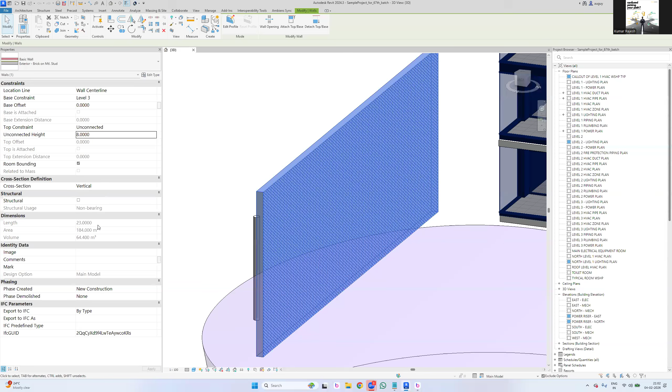Now let me make it more complicated, same concept. I love making concepts more complicated. Hello sir, am I audible?

Sir, actually I didn't understand what is double and what is integer, for example. Okay, fine, see - if your mobile number is an integer, let's consider my number is 9133665544. It is an integer actually, why? Because there are no decimal points there. In case it's 9133366.5544, this is called double. Where there is a decimal value, that's double. So remember in a funny way, like a kid's way - they remember everything with similar keywords. Decimal D, double D, they match it.

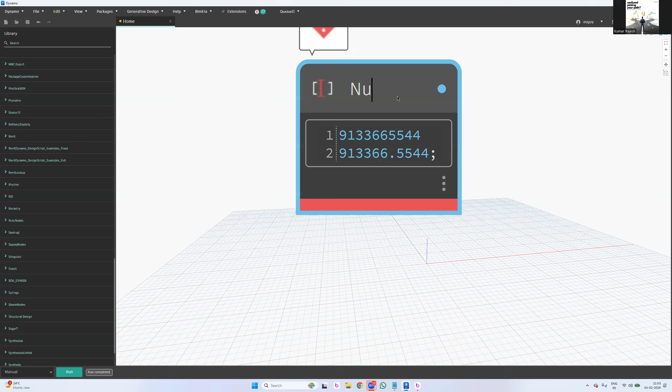Clear? So remember like that - 913366, there is a decimal value, so we call it double. And the above one, since there is no decimal value, consider it an integer. So both of them are actually numbers only, but we should not pronounce it as a number. If you go and talk to any developer, they don't pronounce it as a number, never - they call it double or integer.

Either integer or double. We will tell it as an integer or double. Okay, double. Got it. Simple. Clear. But to enter these values, there is a node called Number. In this Number node, you can enter an integer, or you can enter a double as well. Is this clear?

Yes. Okay, so this is a node. And what is this? This is actually a code block. What is that code block? We'll discuss that later. What if I write 9133665544? It's entered, but it is automatically adding that 0.000. We'll see. I'll confuse you in some time.

But first, let me make the concept clear. If after the point it will be 0, should we consider it as a double? Nice question. Because the zeros are already eliminated. Correct, so a nice question. I'll just give you the example. There is a node called Object.Type. So here there is a node called Object.Type.

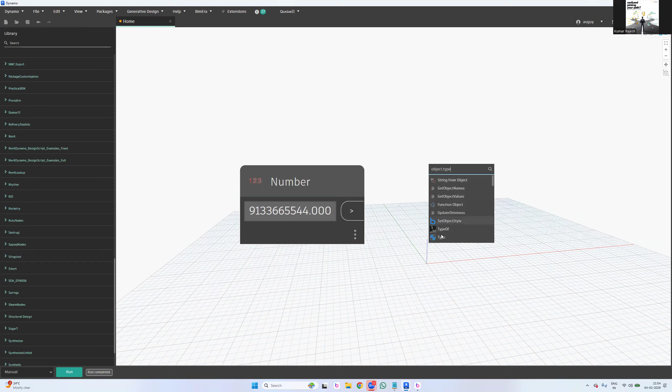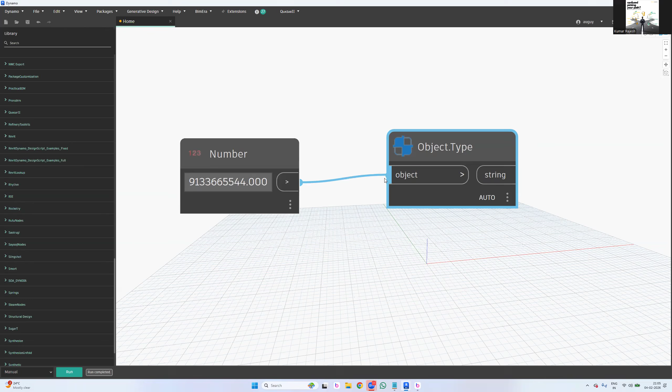This is your friend, frankly, who is going to take you in the correct direction when your script is going in a direction, if you understand the correct inputs and what you're exactly getting as an output. Is it clear? A little bit. Okay, fine. Let me show you. When I connect this to this, it's clearly saying, what is it saying? Hold on.

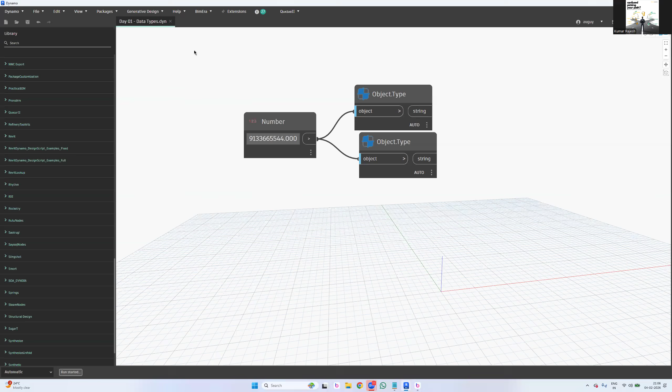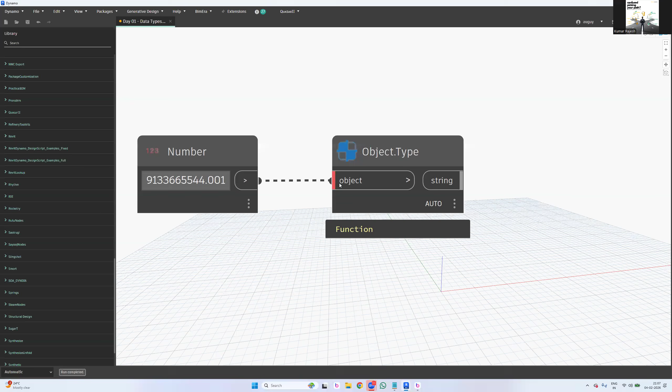See, it is showing it's an integer, int64. Why? Actually, there are some decimal values with 000, but it's still showing it's an integer. Okay. Now, what if I just add one at the end? It is not showing anything. Instead, it is showing null. Now it's showing it's a double.

Double. What if I change this value back to 0? Integer. What if I change this value to 1? It is saying it's a double. So after the point, after the dot, if the value is completely 000, we can consider that as an integer. First it will come as null, but why is it null? It is under processing. That's the reason it's showing null. Got it, completely understand. 000 is actually int64.

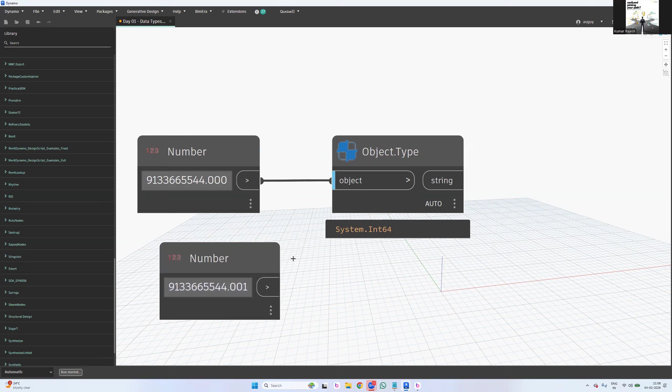But this is only for readability. Application-wise, it is something else. I'll explain in the coming sessions, because data is going to confuse you a lot. If you know exactly how to handle data, consider yourself a pro, seriously. If you don't know how to handle or at least understand the data, you are seriously zero. So first get a good grip on the data types concept. Now, what if I have another number with one? Then it will show you it's a double. Just a matter of the point. So this is going to help you know what exactly the user has entered.

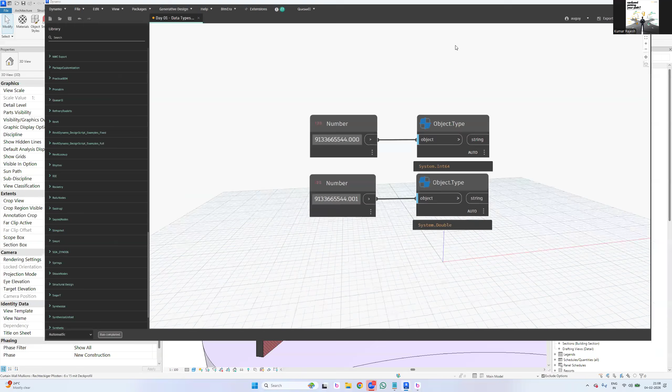And not only based on entering, there are some parameters which store some content in them. For example, let's go with some other elements, then we'll come back to this topic. What is the section parameter's data type? Integer, sir. Why? Because there is no decimal, it's a whole number. Perfect. Equivalent diameter? Double. Very good. I hope you can sense it's very simple. Area 22.742, double. Height? Integer.

So now here we have to change the way of thinking. Don't just read it and say. Apply some common sense. Generally, the width can accept something like 725.256, correct? A duct can accept decimals. That width parameter can accept a double. Am I right? Yes. So even though there is no decimal value at the end, you have to start thinking it can store a decimal value. So that parameter is actually a double parameter. Are you clear here? Yes, yes.

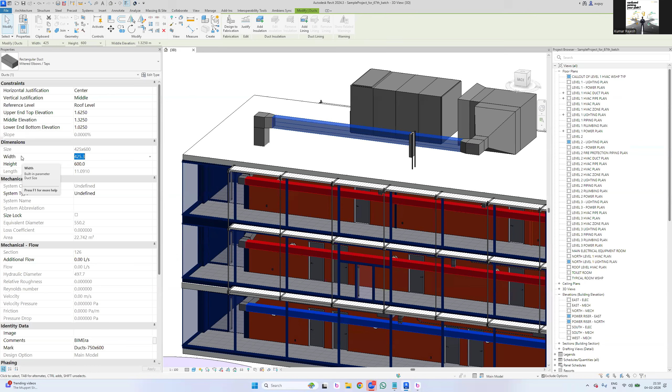Yes, if the particular parameter is accepting a double, consider it a double. We can't say that it is an integer. For suppose, let's create two different parameters. Manage project, parameters.

I have a doubt. Does the value affect anything? Like if a width is in meters. If it's an area, number-wise we can say integer or double, but as a value it's an area, or a length. Will it affect anything? No, nothing.

No, it will not. That depends upon the modeling. I'm explaining a simple concept. We'll discuss those advanced things later. Whether it is going to affect is the designing part. So let me explain the concept again. That is an irrelevant question to this.

Now I'm going to create one more parameter here. The parameter name is BE underscore integer. I'm going to create an integer parameter and show you the difference between the integer data type and the double data type. Sometimes when you are trying to set a value to a parameter, it will not accept. Both are numbers, but it clearly says I can't set that value.

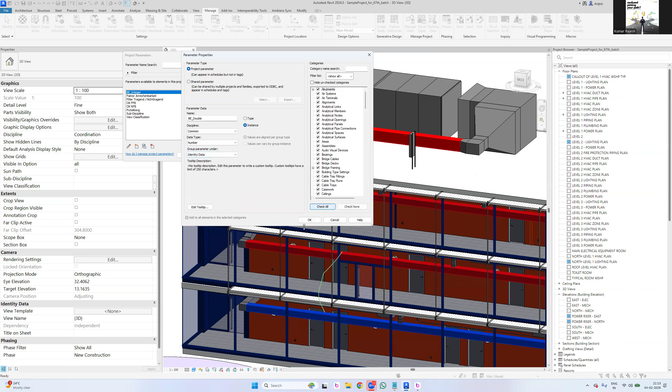So I've created two parameters here. Guys, are you clear? Yes, understood. I'll show you with Dynamo itself why it is not accepting. Now, when I click on the same duct again, I see the BE integer parameter.

If I enter 123.456, it clearly says enter an integer. What do you mean by integer? Most of you got this warning at least once in your experience, but didn't understand why it pops up. Enter an integer means it accepts values without decimals. Clear, everyone? Yes, clear, sir.

Now, what if I enter into BE double 123.456? It will automatically add 0.0000 to complete the double value. So 123.456 is working. Let me try 0.000001. It is accepting now. Initially it was not, because it is not considerable as a main value; it will be eliminated in the round off. Clear everyone? So 123.456 is allowed.

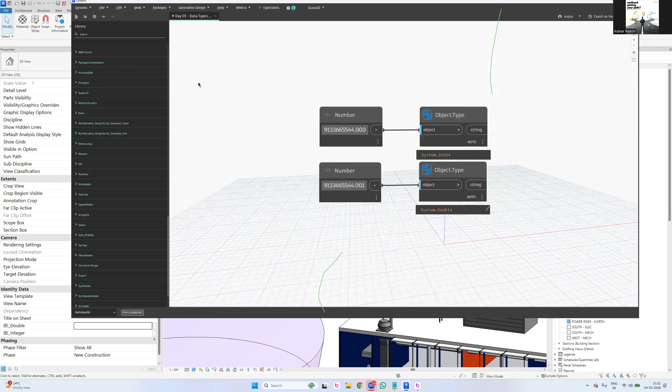Okay, all of you are correct. But what is the exact answer? I am going to reveal it at the end of today's session. Don't worry. So I hope you are very clear with integer and double. Correct? Yes. Good. So let's jump into the next concept, I mean the next data type.

It is string. So what is a string? It represents text data, like your name, Dibaj Manna, Deena Ravi, Gopal Patram, or a company name, or our passwords. Even if your Gmail password is your mobile number, it will still be read as a string, text only. How? I'll show you tonight. So examples like wall and level 1.

How come level 1? I have a number, and I have text also. So what do you mean by string actually? It is text. So here number is fine. Strings, in the sense, it is actually what happened?

It is a text only. So alpha, let's say, or else we can call it alphabets. So here I have complete alphabetical characters. Okay, alphabets. So here I have an alphabet, and space is considered as a special character. So consider I have a special character, I have a space, and I have a number, a numerical character. I have an alphabet, special character, numeric.

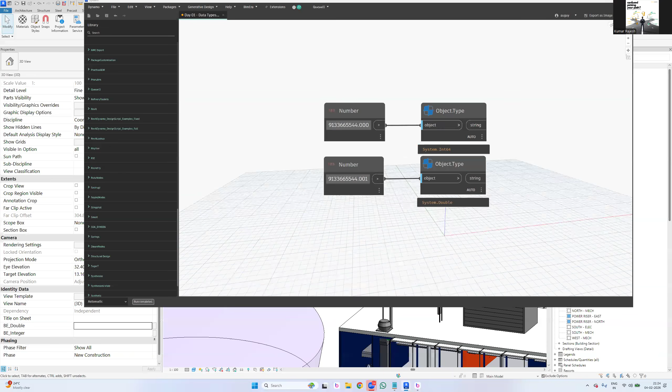Numbers. Okay. So if you have seen anywhere the complete text, or a text with a number, I mean alphanumeric and alpha ASCII numeric. Special characters we generally pronounce as ASCII. Okay, so this is alphabetical, this is an ASCII character, and this is numerical. That's it. Is it clear, everyone? Clear? Okay. So let's go and read our parameters again.

Now, center. What kind of parameter storage type is this? Text. Data type text. Vertical justification, also text. Reference level, text. Double, double, double. Oh, we have a special character here. Slope, percentage. What is this now? Is slope a double or a text? I mean string. String, it should be. My answer is string.

How many of you are with me? I think it's a double. It's a double or integer. There are points. Yeah. Okay. Slope we can also write as an expression. Let's go with a few more examples. Okay, no fighting. Size 425 into 600, that is string, because there is text in it. Okay, double, double, double.

Undefined, string. Okay, what if there is no value? What do we call it? Is that a string or a number, I mean integer or double? String. If there is no value, we cannot define. Null, sir. Not both. Right. Correct.

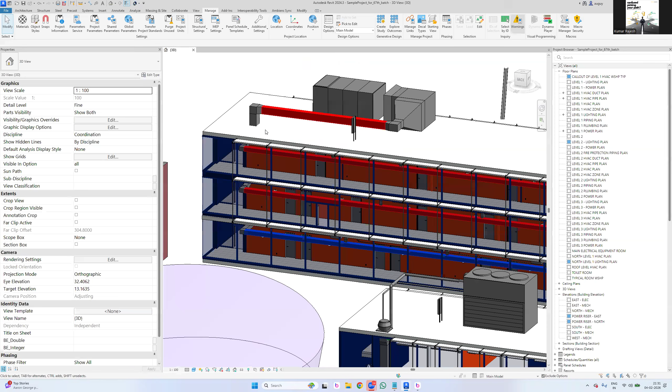Hello, can you say that one more time please? Do you need it? Okay, actually I'm coming from my office, I'm just coming from my bike, that's why I didn't understand that thing. Sorry, then you can't bother everyone in the middle. Okay, but still, first time, that's fine.

See, so on the left hand side, what are the things we have? We call these parameters. Whatever we have here on the left hand side, these are parameters, and these are parameter values. So parameter name and values - names are always in the string format only, always like a string format, text format.

Can you create a parameter with a number? Recording in progress - hey, who is that? Anirban. Hmm, okay.

Parameter values have different data types. This one has a different data type, this one has a different data type - all of them have different data types. So these data types have to be played with, based on the value here we have to decide what it exactly is. This is a double, this is a text string - actually that is not a string. For the time being, to make you understand, I'm pronouncing it as a string, but actually it is not a string, okay, try to understand. This is a Boolean - we'll discuss that in some time.

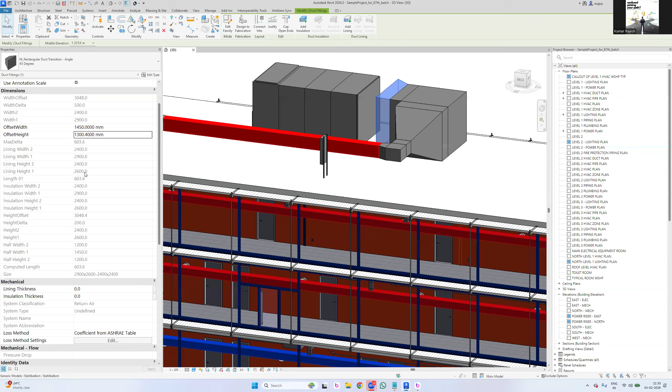Double. All of them are double. This one is a string again. See, when I hover the cursor on this, it is saying it's a text.

After built-in parameter, see the third line. What is it saying? It is a text. Undefined. Hover the cursor. It is again not showing it is like a text. It is showing it is like a drop-down list.

We'll discuss this built-in parameter. After built-in parameter, it is not showing it is like a text. Here it shows like a text. But here, yes, the system type is not showing as a text.

So actually, when it is created, it's not selected as a text. There is a specific reason, close to this. I'll explain. So with this built-in parameter, it is not even saying either it is a text or drop-down list or something. I'll explain what exactly this is.

So pressure drop, image, comments, mark. So what is the mark parameter storage type? That's also an integer.

String. Come on, you still got confused. Don't read the text, whatever mark it will be is string. Why? Because the mark parameter will accept even alphabetical in it.

Special characters in it. Yes, yes, we can use it as a filter or something, correct? Multiple, yes, correct. Yes, we can use this like a filter.

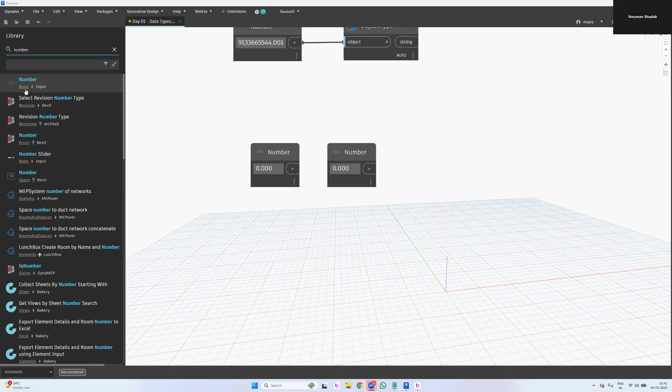That's it. So don't get panic, but don't just click on it because it will directly take you to that folder. Then again you have to sit and find where this number is.

To play with text, you have to type a node called string, not text. So again, basic, input, the text—that's it. To play with the integer and double, you use this. To play with text, alphanumerical with ASCII characters, we'll use a string here. Guys, are you clear?

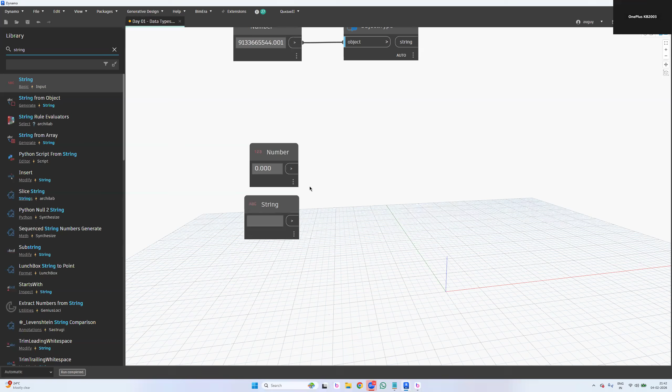Yeah, Rajesh, I want to use this very precise. I don't want to see these decimal values. There is an option—just go to Dynamo, and in the preferences, number format.

See, if I change the number format to 0 and close it—unfortunately, we don't have a refresh button in this Dynamo. We don't have a refresh button anywhere. This is not a refresh, okay. It is an execution process. So we don't have any refresh like F5. F5 works, but not in this case.

Control C and Control V. Or else, if I place a number node directly one more time, it comes with a single decimal value—I mean, a single value, not the decimal values. Are you clear?

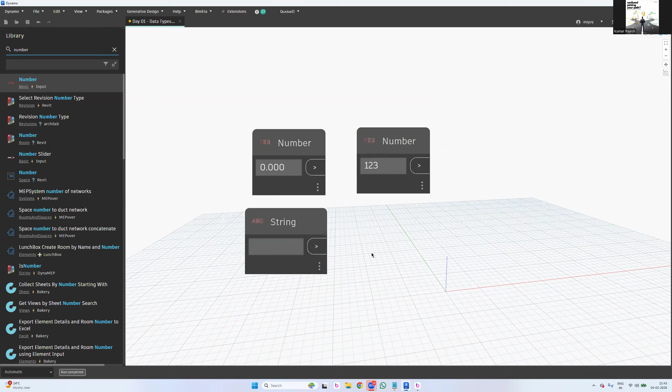Guys, are you clear? Yes. Okay, if you want to see—because you know that there is a value 123.456, it is showing like it's 123, correct? But when I'm checking the object type, it shows it is a double. It will confuse you. Are you clear? Okay, 123.6 will come under 124, right?

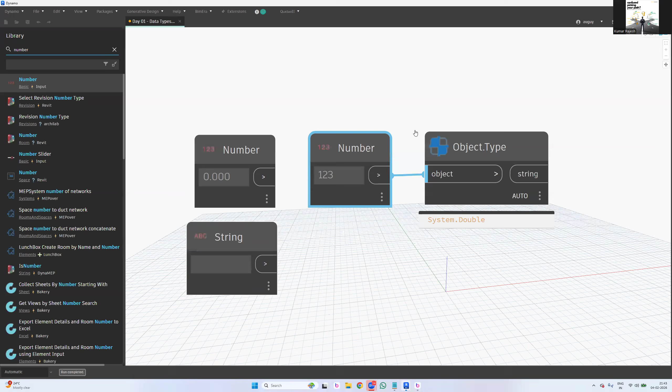123.456—now what if I just change the preferences again? These confusions will happen, okay, let me just close this. And what if I Control C and Control V—

exactly, I can see the 456, and clearly the actual value is 123.456, right? 123.456, is that clear? Yes. So the actual value is 123.456, but since you changed the option, you turned on a different preference, that's the reason it's still showing like 123, and 123 is generally an integer.

Am I right? Sir, sir, yes sir, can you just make that example 123.6?

Okay, we change the preference. I thought it would become like 124 when we change the preference. That's why I—Rajesh, sir, I had a question.

What is 64 in INT 64? Actually, it's our operating system bit. Initially we used to use 16-bit machines, later 32-bit, now we are using 64-bit machines. So INT 64 means it can store a total of 64 bits in it—1, 2, 3, 4, 5, 6, 7, 8, 9, 10, 11, 12, like 64. Got it, that's what INT 64 is.

Okay, fine, so it depends upon preference. Don't get confused—the data will confuse you a lot, and you're going to see that in today's and tomorrow's session. How even a small number which looks like a number, when you read it, shows up like a string. Okay, fine, let's jump into the topic.

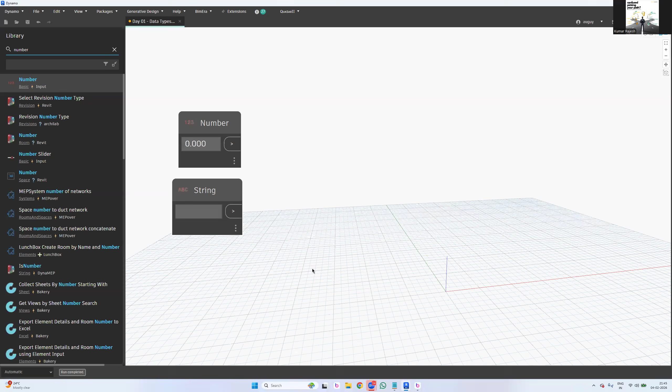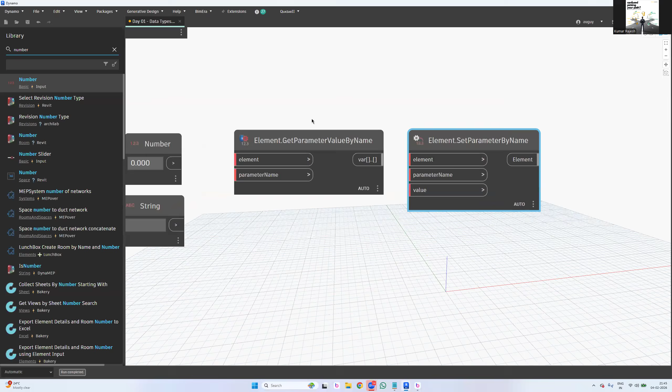So if I want to enter a number, let's say get parameter value by name. There are two different sets of nodes: get parameter value by name, and set parameter by name. These are two completely different kinds of nodes. One helps you get information - it just gets the information, it is not going to disturb any elements in our Dynamo.

Simple, are you clear? No sir, I didn't understand. See, I'm clearly telling Dynamo to do this - are baba, I have an element.

So there is a dot here. Actually there are two parts. There is a very huge importance for the dot in general in coding. I'll explain why, and later in the coming sessions there is a concept called dot notation. For the time being, try to understand.

Before the dot, it means what I'm expecting - what actually, let's consider, that explanation of what is having with you. What is having with you? And after the dot, what do you want me to do? What do you want me to do? Guys, are you clear? Is it clear?

Yes, are you clear? Before the dot, what is exactly in your hand right now? I have an element with me, and I want you to get parameter value by parameter name. So I'm telling that I have an element, bro. So if I want to play with the work set, so work set dot get something.

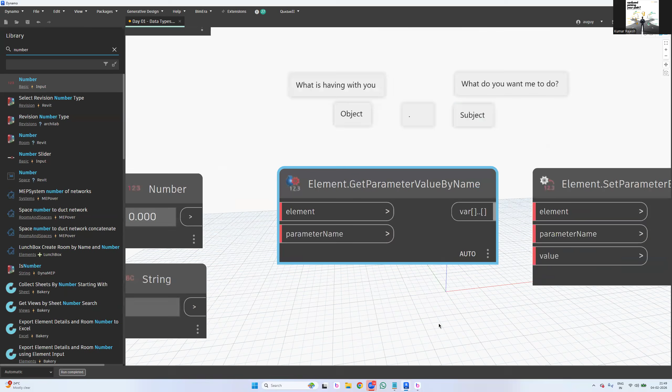Yes, clear. So now, how do we connect those exact inputs? Here we are playing with a 'get' - so get is actually trying to get something, so it will not disturb any set process.

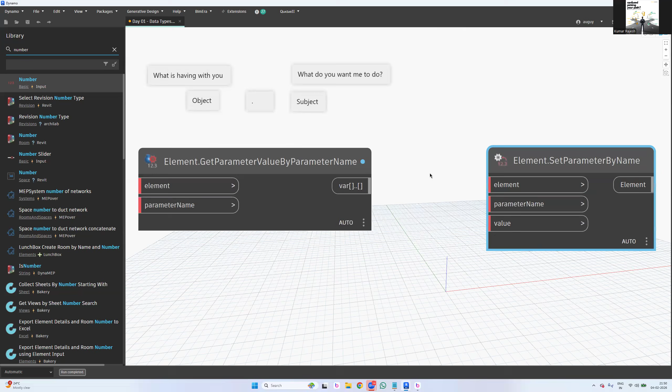But here we are trying to set something. So I have an element, we are clearly saying I have an element, and I want you to set a parameter value by parameter name. Actually this has to be the node name, but the node name would look very lengthy and somehow funny, correct? So that's the reason they have truncated and designed it like this - get parameter value by parameter name.

So here, set parameter value by parameter name. So now I have an element, I want you to set a parameter value - where is the value? Here. By parameter name - to which parameter? You have to enter the parameter here. Clear? Yes, clear.

Let's play live. It is expecting an element. So how do I bring that element now? There are multiple ways to bring an element. I can connect a single element, I can connect multiple elements, I can connect elements with a condition - like if I say bring all the ducts, I can connect all the ducts to this. Or get only the ducts from level 1, I can filter and get it and connect to this. Or I just want you to pick manually some set of ducts.

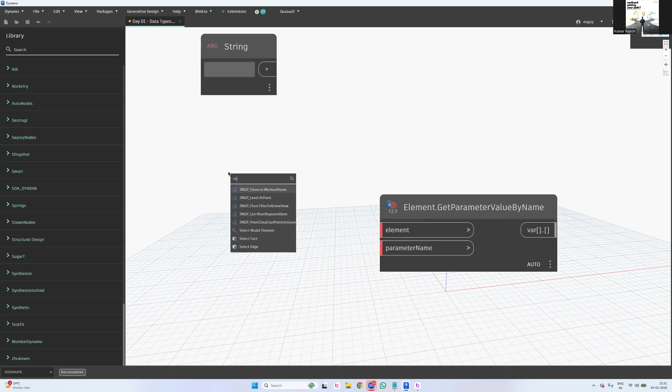Still, I can do that. Rajesh, only for testing, I just want to check how exactly it is working. Only a single object. So, Select Model Element. When I click on this, this is a button actually. You have to click on this button and wait, and then jump into Revit.

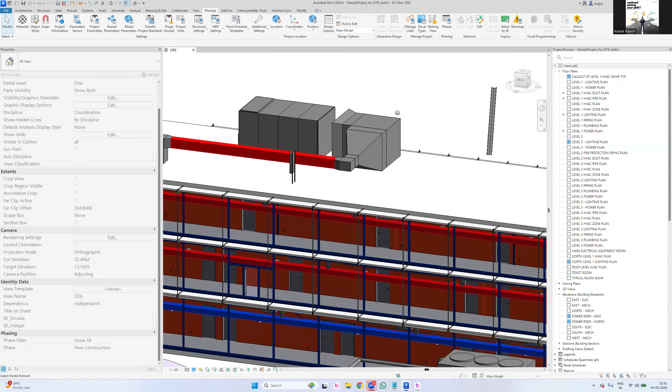So here it is showing something like a stop sign. This stop sign will be active whenever you start placing on any element. So let's take this duct. Okay, got it. Now if I come back, it is saying 478246, and that is a duct. Are you clear? Guys, are you clear?

Is that a very simple element ID? Yes, that is an element ID. Yes, got it, sir. 478246. So 478246, select by ID. 47, sorry, what was that? 478246. See, that's the same element.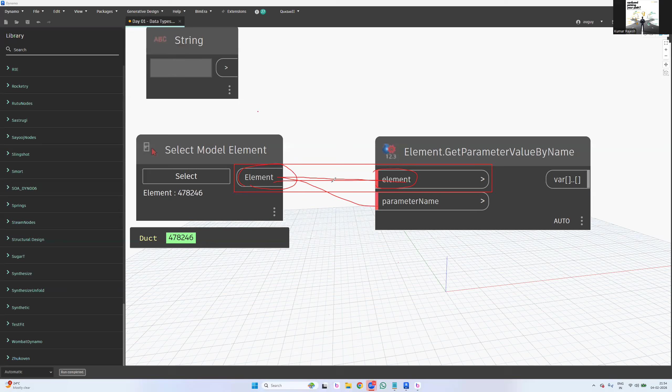Correct. Exactly. So we have to connect exactly in sequence. It is expecting two inputs, input one and input two. The first input is clearly saying element only, so the second input must be parameter name. You can't shuffle the order. So if it is expecting an element, connect this element to element.

Okay. Now the red turned to blue. It doesn't mean it is working. So if red is turning into blue, it doesn't mean it is working. Seriously. I'll explain exactly later. Okay, fine. So element: when I hover the cursor on it, it is saying Revit.Elements.Element. What is it? Don't ask me now, I'll explain later when the time comes.

So when I hover the cursor on this: the name of the parameter whose value you want to obtain. The name of the parameter for which I want to obtain a value. Simple. And use a string. I'll accept a string, bro. So what input is going to be accepted? String. String only. Correct, sir. Because it's clearly saying, but don't expect it on every input parameter, it will not show you.

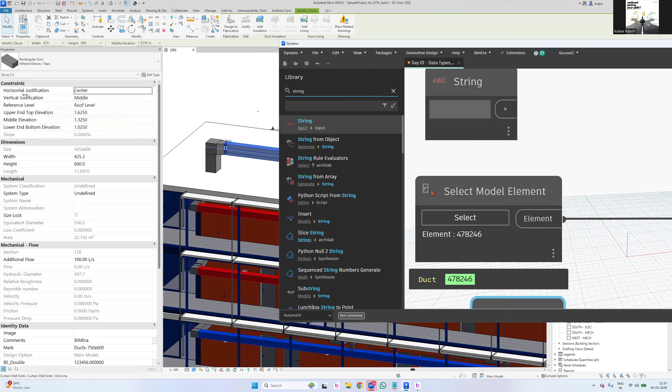Okay, then I'll place a String node, or else I'll use the node library, String. Don't get habituated to finding nodes from the canvas. Since I already have a bit of understanding, I'm using it here, but 99% of the time you have to use the node library. So I place the string, cool. And parameter name, let's go and get some parameter. I'll say horizontal justification. Okay, no, let's get middle elevation.

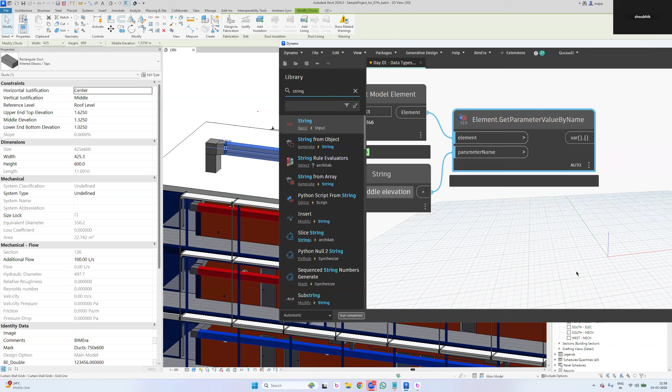Middle elevation. Okay, now when I connect this to this, what will be the output? It's supposed to show 1.3250. Why is it not showing? You should change E to capital, sir. Capital C, case sensitive, I guess. Case sensitive? Okay, capital M here. Capital M. Okay.

Capital E also, right? Yes. Space also? No. I think it is integer. Are we using string? No. Now it's showing. It's showing 1.325. So we need to type exactly what it is asking, right? Yes. Even if you missed anything, or if it is not exactly case sensitive, it will look in the database, consider there is no such parameter, and it will not bring you anything.

Now, middle elevation, and now if I'm asking for the width parameter, change to width: 425.256. Actually, the value showing here is 425.3. It is a rounded value, but here is the actual value, 425.256. Guys, are you clear? So if I type height, I'll get the height here, 600. What if I'm asking for additional flow? 100. It is not printing liters per second here. It is just getting the number, if you noticed. Correct? Yes.

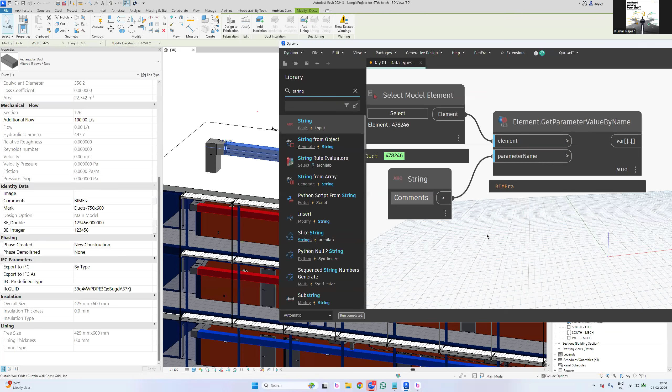Now, again, let's say friction: 0. Very good. So comments: BIMEra. So it's getting everything here. Is it clear, guys? Yes. Now, the biggest part of our concept. Let me try to change this value to something else. Sir, I just want to say one thing: when we get the parameter value, it will only understand whether it is double, integer, or string, but it doesn't understand units. It will not read the units.

Okay, so because of the unit, I guess it will only act as a string, right? The value is only string? No, number as well. Can I check whether the value I get from this parameter is a double before I use it? I'm going to explain in a different manner. So when I connect this, it's saying it is a string. What if I'm playing with some other data type? Let's say additional flow, and it is saying it is a double. Do you see that? I got the number 100, but still it is showing it's a double.

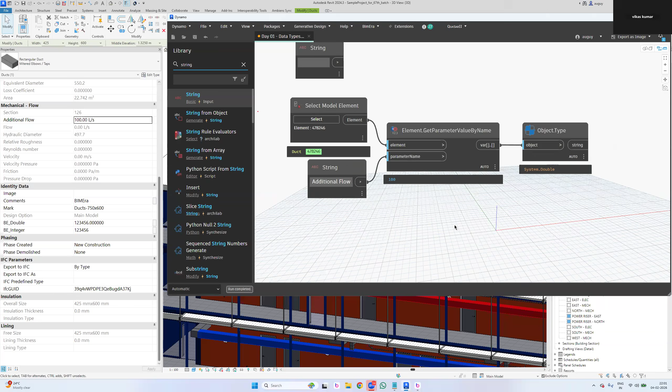Why? 100 looks like an integer, but it is saying double in the sense that additional flow can be 101.346, something like that; it can accept it. So that's the reason it is double. This parameter can accept decimal values. Is this clear, everyone? Yes, clear, sir. So this is how we are extracting the data, and we are cross-checking the data type.

Rajesh, it's a very headache process. I have 50, 60 parameters, and I'm a coordinator, I'm a manager. Do I have to play like a kid? No, there is a process. I'm asking Dynamo: I have an element, can you please get me the parameters of it? Element dot parameters, there is a node. I'll type it here: Element. See, again the same concept. What do you have with you? I have an element with me.

What if I have a sheet? I'll type sheet. What if I have a work set? Work set. What if I have a wall? What if I have a duct? See, the element nodes keep on changing. What if I have a column? Guys, are you clear? You must be very clear about what you have. Can you explain this? This block is especially for finding nodes, this node library. If you want to play with a particular object or element, you have to type exactly what it is. Is it clear? If you want to play with something, you have to type it here.

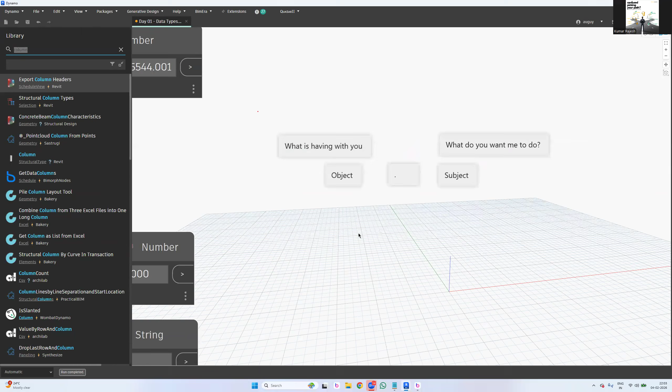I want to play with a list, type a list. I want to play with a string, type string. I want to play with a number, type number. Are you clear? Node finding to find the particular nodes. Okay. Now I have to say this in very simple terms. Let me show you one more.

This concept is called actually parent and child. That's going to be very interesting, but this is not a part of this concept. But since few guys are confusing, let me make it very clear. This is the concept actually, object and subject. So I have a person with me. There are some sort of typical concepts again, but three different typical stuff. Okay. So I have a person.

I have an element. I just want to know what is the category, element dot category. I have an element and I want to know its name. I have an element. I want to check what is the ID of it. I have an element and I just want to know what is the location of it. I have an element and I want to know what are the parameters it has.

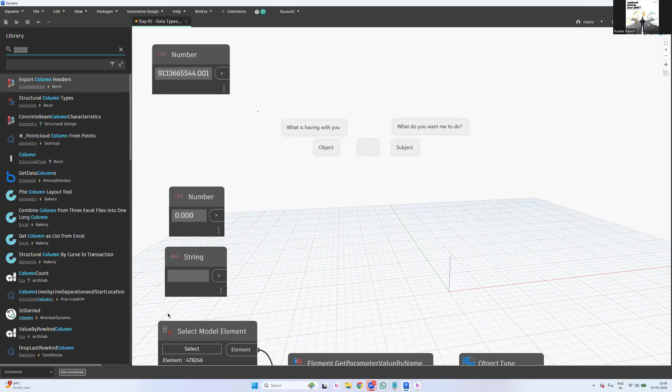So today's concept is to make you understand what is a text, I mean what is a string, what is a number, I mean what do you mean by integer and double, that's it. Okay, so the rest of the concepts I don't want to scare you with on day one itself. There are many scary sessions, don't worry. Okay, so fine. So what I want to explain here, yeah, dot.

Now I'm saying I have an element. So when you check element dot, when you put a dot after it, it is going to give you the list of all the functions it can play with an element. So if you have an element, it's going to get the work sharing tooltip info. This node will tell you, if you connect an element, who is the creator, who created that particular element, who is the current owner of it, and who changed it, who moved it.

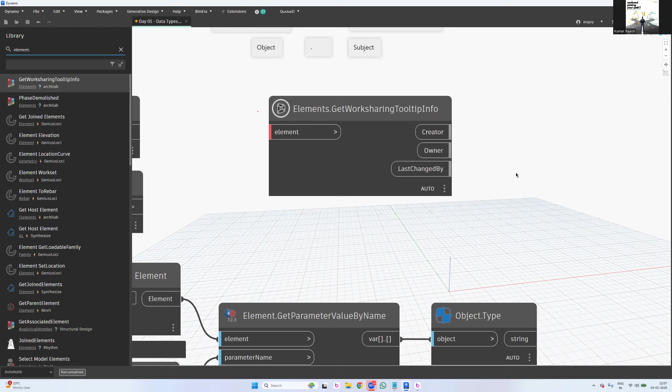Let's say Gopal Patra placed some elements, walls. There is another guy, Kajal. Kajal has changed that element. She has moved one from one position to another. Then we can see both people's names here if I connect the particular element to this. See who created it, Zhang, who is the current owner, A, and who changed it last, Zhang again. Guys, are you clear? So if you connect something, I'm going to get that complete work sharing information.

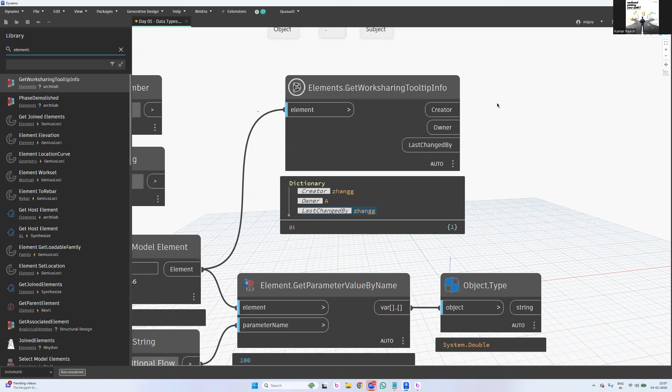Are you guys clear? So if I want to get the name of that element, after the element I have to put a dot. Then dot will explore many things. Understand? Unfortunately, this node library will not give you the exact things. That is the only reason we are using another node library. This is especially for our students.

Okay, so if I type element and put a dot next to it, then see how many nodes are there. Thousands. Do you see that? When I keep on scrolling, they keep on coming. So all these nodes are to play with elements only. Guys, are you clear? Yes, clear. In this node library, you can't see that many, maximum 20 or 30.

Why? This is a dedicated one. And this doesn't need more. I mean, I don't want you to use your brain. Seriously. Okay, of course, in the training, you must use it. After training, I don't bother, because you will be more lazy with some advanced strategies. Okay, fine. Here, you have to apply the 6 different strategies to play with everything, but still, there is a lack in it.

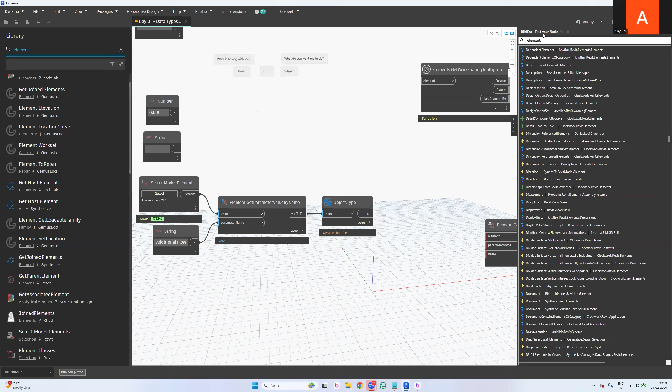So if you're having this, we don't need to install any external packages? Everything will be covered in this, or it will just show the inbuilt? No, no, no. You have to install the packages. Within the packages only, it is going to show you. If you don't have any packages, it will show you the same limited functions only. Clear? So I'm going to share you all the packages. Don't worry.

Element dot, I'm going to type ID. So after element, I'm asking, I want to get the ID. So when I click on it, okay, it is expecting element. So when I connect this element to the element, it's going to give you the ID here. Say 478246. Are you clear?

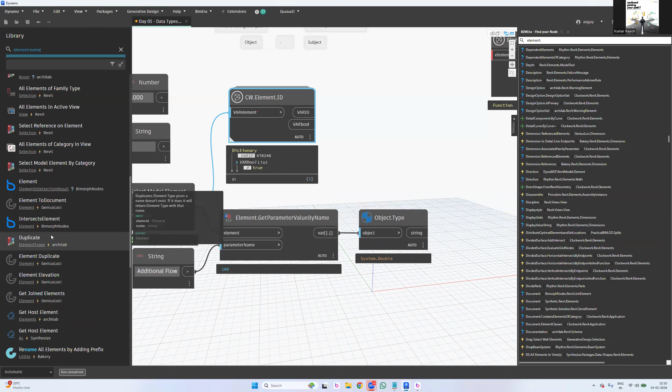So if I'm asking for element dot name, where is that? There is a different way of picking the nodes as well. Very funny, because a person who is having real knowledge can directly place that node. Seriously, otherwise not. Now, element dot name, there is a direct node, but still I couldn't find anything here.

Next strategy, I changed the strategy. There is no dot now. If you notice, now see, I found element dot name. When I connect this element to the element, it's going to give you that. It is a mitered elbows taps. Are you clear? So element dot ID, element dot name, element dot.

If I want to get the location of it, I'll type location, element dot location. Okay, fine. When I connect this element to this, it's going to give you where it is exactly. Do you see that? Actually, it is a line with the starting point and the ending point. Guys, are you clear? Yes. We'll discuss this topic later. Okay, fine.

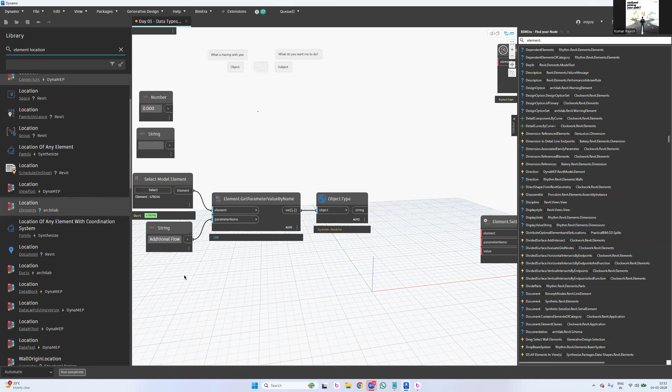Now additional flow. How do we exactly get it? Now I want to play with element dot parameters. Let me check element dot parameters. So the way we read element after this dot, this will come here, or else you have to read it in a different way. Revit dot elements dot parameter. This is actually in the reverse option. You have to read it in a different way actually.

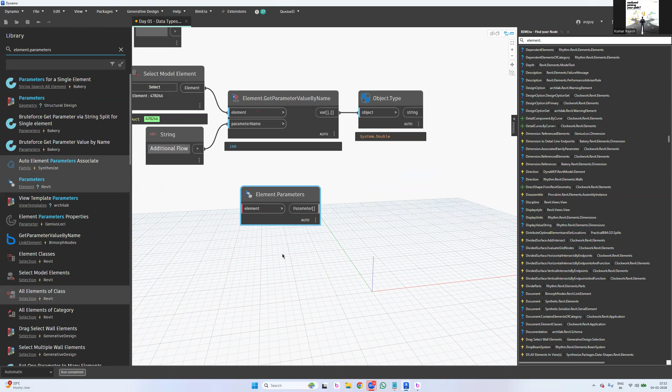Okay, if you have element parameters, when I click on it, now it is asking, if you simply connect me an element, I'm good. I'm going to get the parameters. See, I got all the parameters now. I got all the parameters which are listed in the properties palette. Guys, is this clear? Yes, yes.

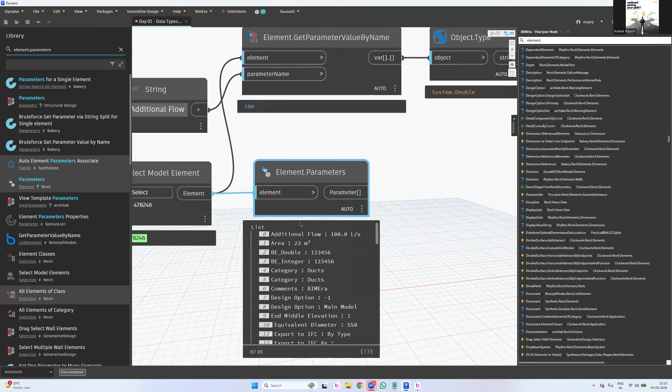Now, what is the output I have here? There are 73 parameters. I have total 73 parameters. So the output is, see, since it is expecting element, and it is returning an element, I connected exactly both. This is actually returning a parameter. To continue further to this, in a node, what's supposed to be here? Parameter. Very good. Parameter only. Correct? Yes, parameter.

Parameter only. Now, let's forget about what it is actually returning. But here, it is expecting parameter. So, you have to start finding a node with a parameter. So, let's change this to the parameter. That's it, bro. Very simple node finding. And there are few more strategies. Let's keep on learning till the end of the training. There are many.

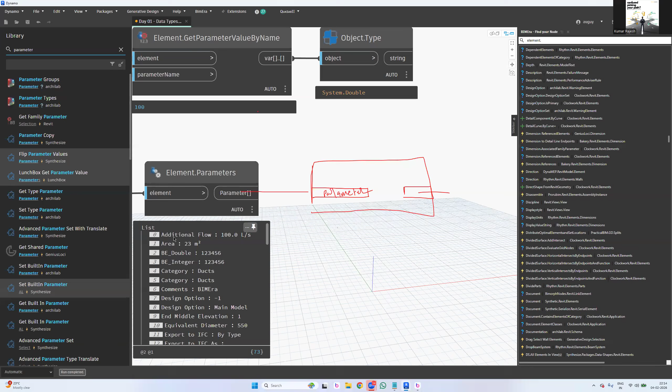So when I type parameter, parameter dot Get parameter is there. Okay, fine. There are many parameters here. So which one do I want to pick now? What do I need exactly? Okay, Rajesh, that's fine. This is returning something. I know that is the next connecting parameter. The node is expecting parameter, but what do you want here? Want to pick any parameter from all these.

Okay, so to pick it, here I have two parts. So parameter, I have two parts here. The left hand part is actually called parameter name, and the right hand part we call the value. Correct? So this is parameter name, and this is parameter value.

Correct? Now after parameter, I have to ask dot name. Am I right? After the dot, I have to ask value. Dot value. After the dot, I have to ask what is the data type. Correct? So what is the data type? Now let me try all this. After parameter dot, I'll type name here.

Let me check. Am I getting 'First' only? See here, revit.parameter.name - the first one is showing something, parameter by parameter name. This is something else, it is expecting something. How do you come to know? Based on the symbol - here it's a plus symbol, here a question mark symbol, here a zap symbol. So there are three different symbols. We'll discuss this topic later.

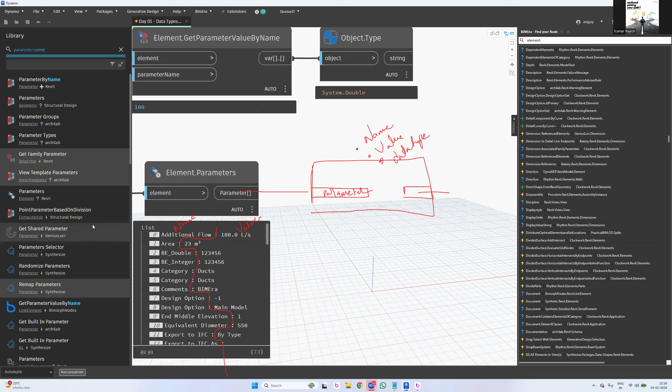Now I'm expecting if I have a parameter, I just want to get the name out of it, not creating anything. So parameter.name - see, this is a question mark, meaning it's asking what is the name of it. Now when I click on this, don't get confused, I'll explain. So parameter and dot name. When I connect the parameter to parameter, it has separated and printed all the names here. Names got separated, do you see that?

Now I want to get the values. How? Parameter.value - come on everyone, what is with you and what do you want to get exactly? So parameter.name, parameter.value, parameter.data type. Okay fine, so instead of typing name, I'll type value here. And again I have to sit and check if it's there.

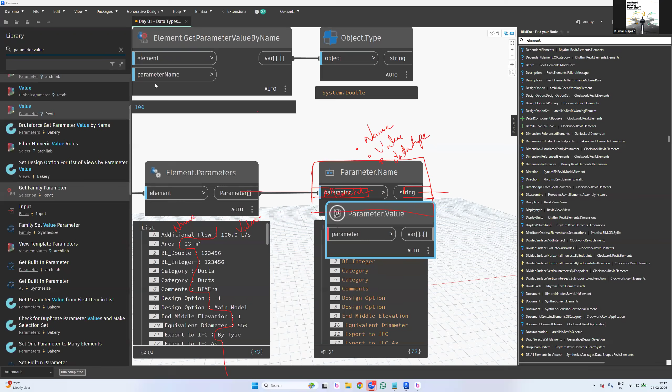Do you have parameter.value anywhere? See, it is there. Don't get panic, because you are finding the nodes faster - there is a technique in it. I'm going to reveal the technique exactly how I'm implementing and finding the nodes. You guys are also going to get the same kind of knowledge. Don't panic. But finding the node is a little bit confusing. You're still in the day one session, bro - it'll take some time.

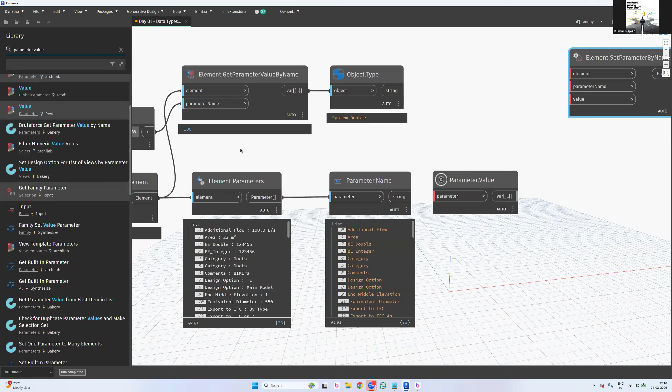Now, I have a question - in this node 'get parameter value', can you explain the output over here? VAR, it's something, what is that output? That I'll explain later, because VAR means it varies. It is not actually a variable, it varies - it means based on the parameter whatever you connect, I'm going to vary the value.

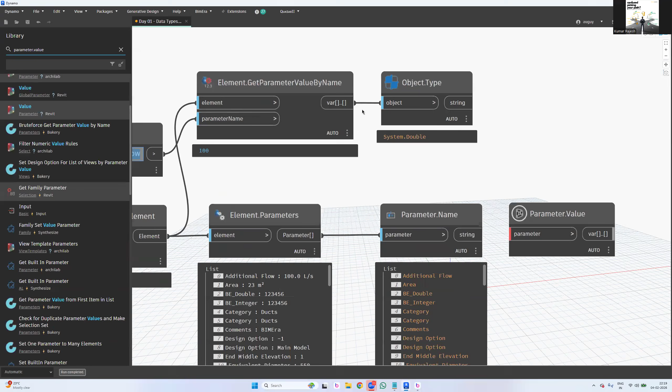So there are multiple values it may bring. For example, if I connect an integer parameter, it will give me the integer. If I connect the string data type parameter, it will get the string. If I connect element ID parameter type, it's going to give the element. There is no strict output it gives. Got it? Clear now?

The parameter.value is expecting something, so from where should I connect? From here to here, parameter, element parameter, or element.parameter? Think twice before you answer - it is expecting parameter.

I have parameters here directly, so can I connect from here to here directly, right? No, these are all strings - that output is string. No, these are all parameter, that is like a string. You're not getting the point - output is string, that is. Are you sure that is parameter? Are you sure parameter connects to name only?

So you are in the day one session itself and you are completely anti to me. Huh? No, answer. No, that's not the thing. I just want to say that element.parameter comes directly from the element. But if there is a parameter.name, there is a string over there which suggests that these values are converted into text.

Okay, what if I connect this to this? What will happen? It will not take, because it's not connecting parameter to parameter - that's not a parameter I guess. So instead, yes, it is actually returning a warning. See, this is a warning symbol, not an error. So this is a warning symbol.

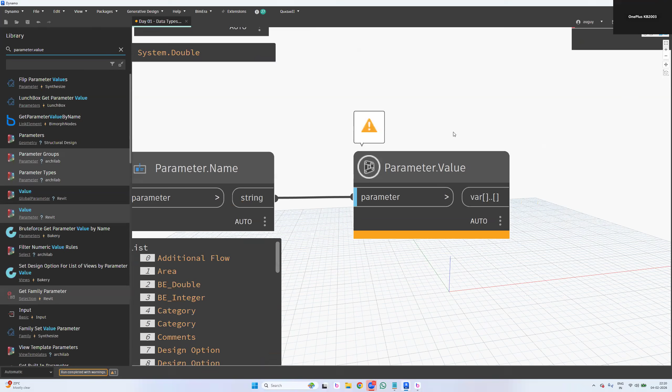What is that warning? Let's read it. I think it will definitely scold me. See, parameter.value - let me explain this in a very polite way to make you understand better. I have to close this.

Okay, control V. Now what is it actually trying to say? Oh, it's loading up, okay fine.

So parameter dot value, this is a node name. Parameter dot value, see I'm breaking it into parts. The warning, every time a new warning comes, try to break it and read it. Where does it come from, maybe this one. Parameter dot value, okay both are okay, that's fine, so this two-way direction.

Parameter dot value, expect - let's make it into the continuation form. Expecting argument, in the sense, input bro. Input, so input argument in the sense input.

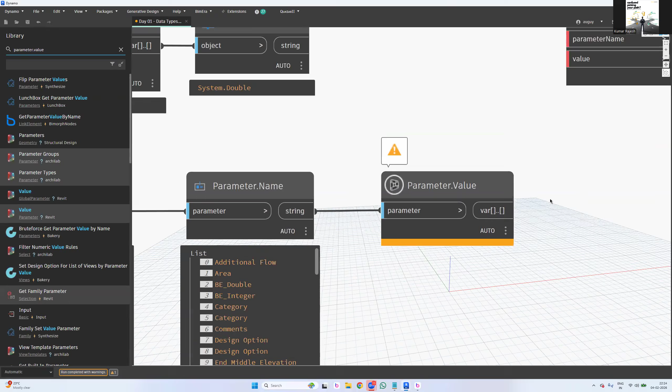Okay, I know you are expecting something, so I have to connect from here to here directly. Happy? I think the node is happy now. Correct? So let me suggest one thing.

Can we not see that warning itself in Dynamo, showing what we are connecting and what is asking for the value, as a display in Dynamo itself? We cannot see that warning.

I've shown you in Dynamo only, right? Here it is, see, it's on the top of it. From here only I took the screenshot, bro.

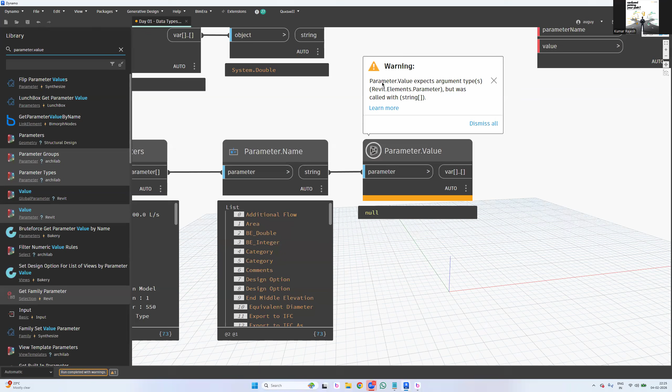So when you hover the cursor on this, you'll see the warning here. So read it, because I can't draw there, I mean I can't use a pen there.

So that's the reason I copied the screenshot and pasted it there. Fine, so that's what happened when I connected this element to element, then I got it. So these are the parameter names and these are the parameter values. Now one more left, what was that?

Storage type, correct? Sir, may I ask you a question? Yes, but we have only 5 minutes. Later, I have to give you some assignment as well.

Okay, so after this let's have questions. Clear? Let me finish this. So...

Parameter dot storage type. There is no actual reason.

I mean if it is crossing beyond 2 hours, it's very hard to convert that video and upload it, it may take a long time. So that's the reason I stopped the recording exactly at 10 o'clock, 10:30, 10:35. Okay, so parameter dot - I'll stop the recording but we'll still continue the conversation.

So parameter dot storage type, where is that? Storage type, storage type, so here it is.

So how do you exactly find this, Rajesh? If you really want to know, it's a very simple trick. If you're looking for something, a parameter, you have to see that parameter in bold, I mean like a hyperlink. So where this is a hyperlink, this is geometry - no, this is parameter, I can play with this. I can use this, I can use this, I can use this. No, no, no, no.

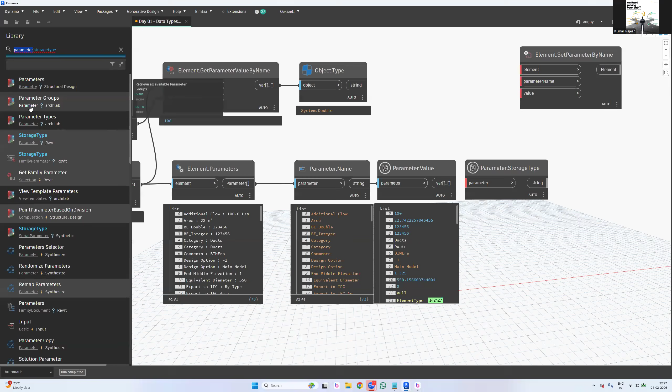I can use this. Guys, are you clear? I'm playing with a parameter, and that particular hyperlink is supposed to be the parameter itself. Is it clear, bro? I'll explain that later, don't worry. Let's learn one by one.

So, parameter dot storage type. Now what you have to do is very simple - that's today's task. If you haven't installed 2024 yet, that's fine, but I do recommend it. I'm going to share the script with you - forget about this, just focus on these three.

Focus on the three additional flow. Check what is the additional flow here. Where is that additional flow? Here it is - 100.00 liters per second. This looks like liters per second because liters per second is a unit, and this is a double. Cross check additional flow - the value is 100, storage type is double. Is it matching?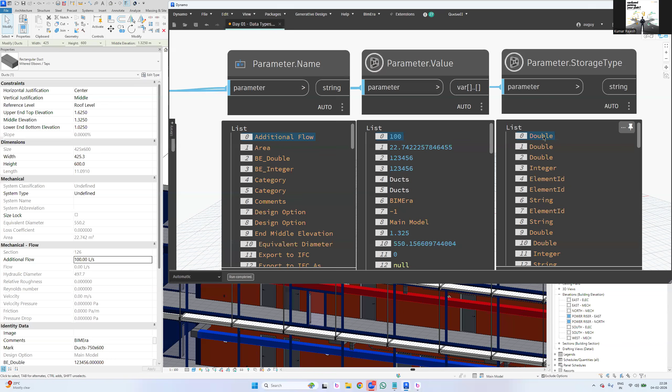Is that matching with your explanation? Yes, correct. Good, let's go and read the area parameter. Now I want you to pick any element of yours - I have to repeat the same process.

This is only in the initial stage, bro. Trust me, you're not going to do this process again and again - only on day one. Are you clear? Only on day one you will do this, or at max day two or day three. Later on you'll be habituated unknowingly, and you'll start answering yourself.

If you're from plumbing, pick a pipe instead of a duct. If you're from electrical, pick a cable tray or a conduit or a lighting fixture - any electrical element. If you're from architecture, pick a wall or something else. If you're structure, pick a column, beam, or something else. Guys, are you clear? Everyone clear?

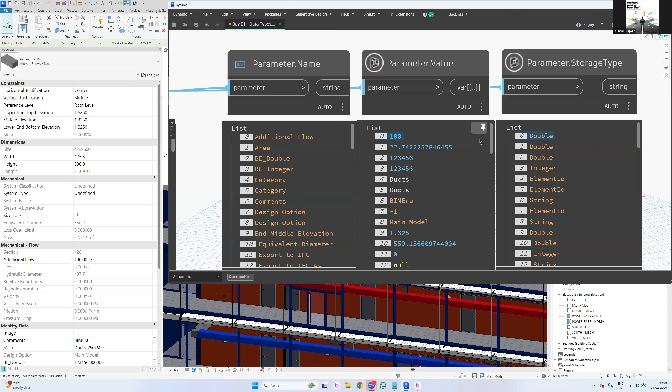So play with the parameters because we are going to play with the whole data only - data is nothing but like parameters. If you don't understand this, tell me clearly. Shall we play with some more assignments on the data? I'm happy to spend some more time on the previous concepts, no worries, but you should be very very clear on it.

Is that clear? Now, area - check 22.5 area. Where is the area parameter? 22.742 - so the value is 22.742. Storage type is double. Good, perfect.

In the BE_Double, the value looks like an integer, but it shows it's a double parameter - double parameter storage type, double data type. Correct? So BE_Integer, okay, 123456 - now it is an integer.

Forget about element IDs for now - tomorrow we are going to see what an element ID is. The main confusions continue tomorrow. Is that clear? I'm not explaining it today because you guys are not 10 or 20, you're 45 - the confusion rate will be more. That's the reason I'm going a bit slower.

So category, forget about element IDs. Check double, double, double, integer only - we don't have multiple data types here. Double, integer, string, element ID - that's it. If you really want to cross check how many data types we have, use List.UniqueItems - this node will eliminate the duplicates. So I have only four: doubles, integers, strings.

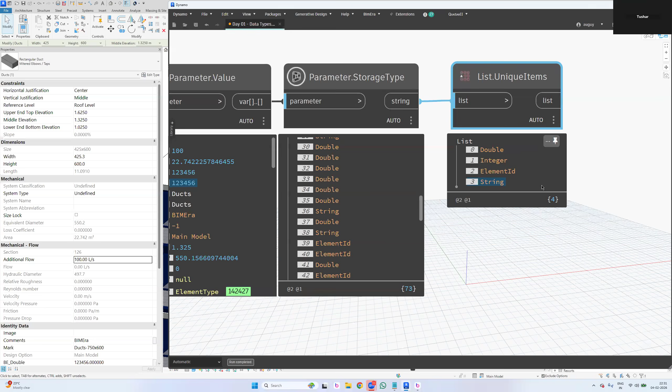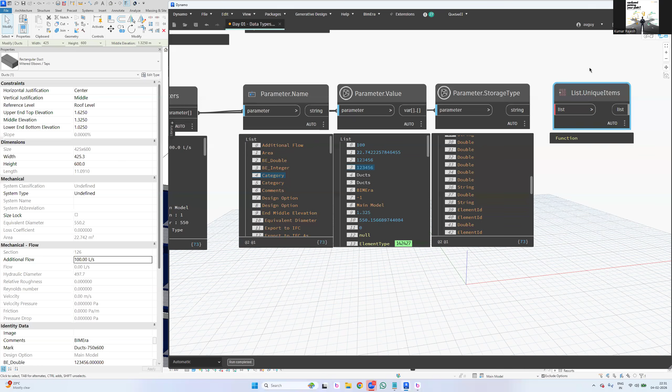There's also design option, and it is wide - is it coming like -1 in the seventh number? I'll explain that later, negative values I'll explain later. Sure, everything will be covered, don't worry - you're just asking one or two sessions ahead. That's it, because if I started explaining I'll deviate to something else, so don't let me deviate. I'll explain later.

Okay, so double - now I want you to play with each and everything. What is this design option? Like what is this end middle elevation? Where is it? Above, above, lower and mid, lower middle.

I think this is a type parameter - no, this parameter's name is end middle elevation. Do you have end middle elevation here? Check in edit type - I think we have it there. Yes, the down of the lower and bottom - this is elevation distance parameter. We don't have end middle elevation parameter. How come it is? Okay.

Equivalent diameter - can I see equivalent diameter? I can see that here, it is there, it's there. Okay, forget about it, we'll see this later in tomorrow's session.

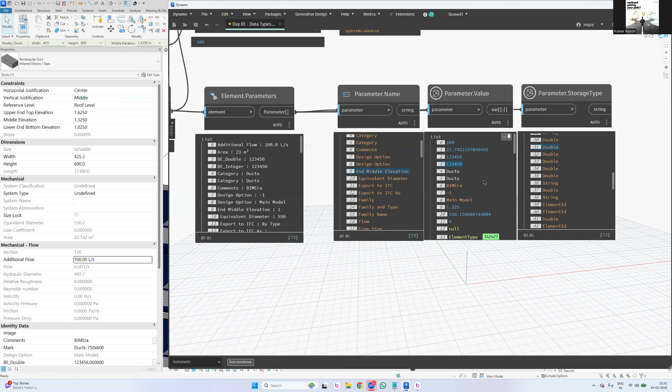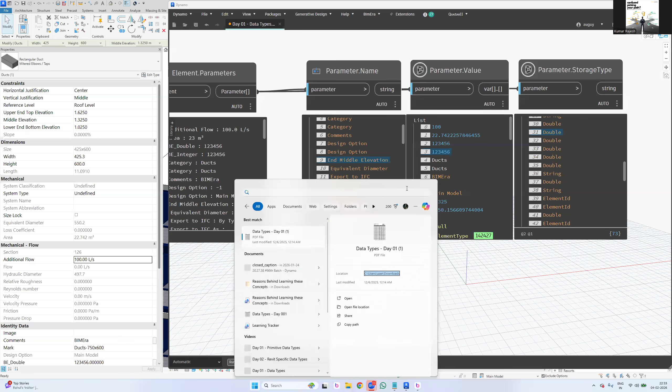Now what I want you to do is write down somewhere - I have already shared your PDF file, which I have to open now. Data types - I hope everyone downloaded this. Data types day one, okay, so this is a PDF. Take a printout of this.

Take a printout of this. Write down what is the element that you exactly picked, if it is a duct or tray or something, and what is the variable name, in the sense parameter name. I don't want you to use complicated names in the beginning. So system type is a parameter, BE_Double is a variable, integer is a variable, comments is a variable. Generally we read it as a parameter name and parameter value, correct? But in terms of coding, we call it variable names and variable values. Are you clear guys?

Yes, yes, so clear sir, here clear. Yes, this is something else, bro. There is one more type actually.

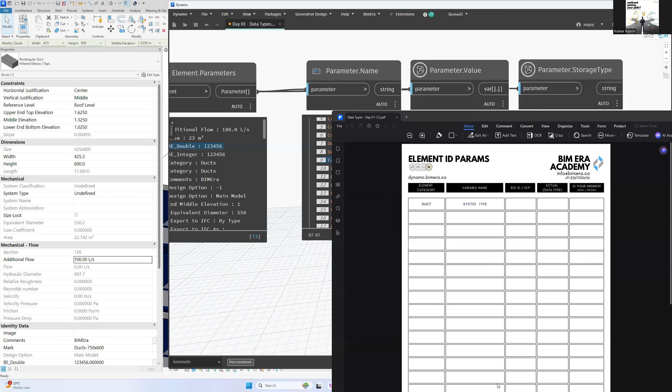I think I have sent you something. dynamo.bimera.co/data types, maybe data type 1. Data type 1, right? Day 1, data types, yeah. Okay, very good, you have mentioned, I have everything mentioned.

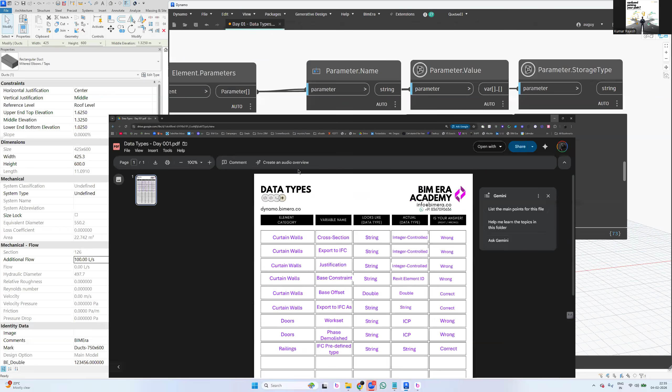See, this is the one. So what is that exactly category, and what is a variable name, and what it exactly looks like. So you first try to understand what this is, and then check what is the actual data type over there. Is it clear? And answer yourself whether the answer that you gave is correct or wrong. Is it clear? If you have seen one parameter like flow, you have seen something like a flow here.

Flow 16, 16 is 0, so the flow is 0.0 liters per second. It is a double. So if you checked, if 16 is double, then your answer is correct. Clear? So just cross-check yourself.

Play with one or two elements with all the parameters. Let's repeat the same process for all the 73 parameters. Guys, are you clear? Yes sir, yes, yes. Are you clear everyone? Take a printout of it and make it happen only with your elements.

Since Rajesh used only the duct element, there is no such rule, because to explain a concept I need an element. That's the reason I picked some random element, whatever it is, in a flow. Clear, guys?

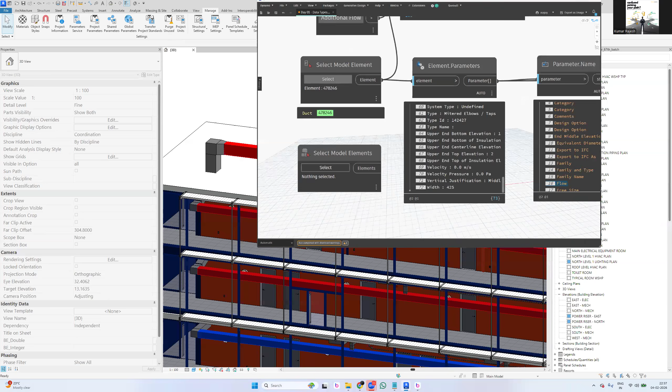Can you once again show how you pick an element from Revit? Very simple, there is a select model element node. There is one more node called select model elements. So there are two kinds of selections. When I just click on this, it is actually a single pick, so I can pick something like random only once.

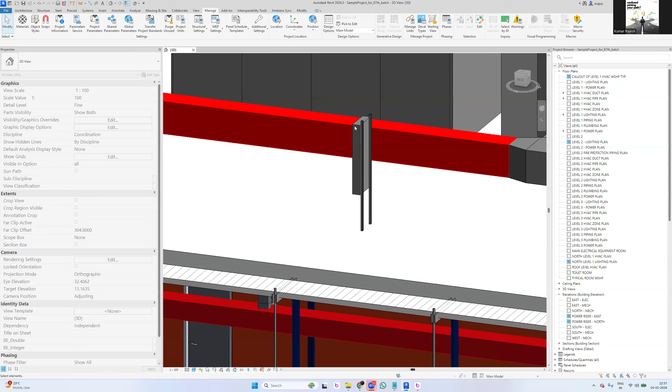Now is it clear? Now the parameter names got changed, parameter values got changed, everything. Select model elements - again just click on select button, minimize this, and when I'm trying to pick one element, nothing will happen. See, nothing selected. The reason is these are multiple elements. Just click on the select button again, and this is expecting window selection like this.

Are you clear? It has the capability of picking multiple elements at a time. So I picked 3 elements. Are you clear now? So when you simply connect this to this, all the parameters will be changed.

Are you clear? Yes, yes. So why are there 150 parameters? What is the zero list? What is the first list? What is the second list? The zero list elements parameters belongs to this.

The first list parameters belongs to the first element. The second list parameters belongs to the second element. Is it clear now? That means there are three elements, right? Three different elements with different parameters. Okay, so don't get panicked.

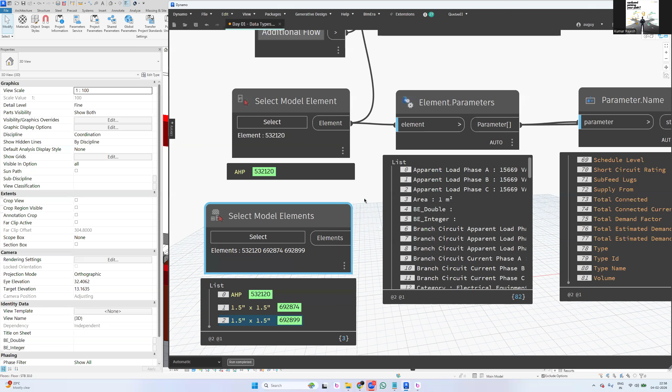So let's play with one element. I'll explain how to play with multiple elements. Clear now? Just click on it, pick any element, that's it.